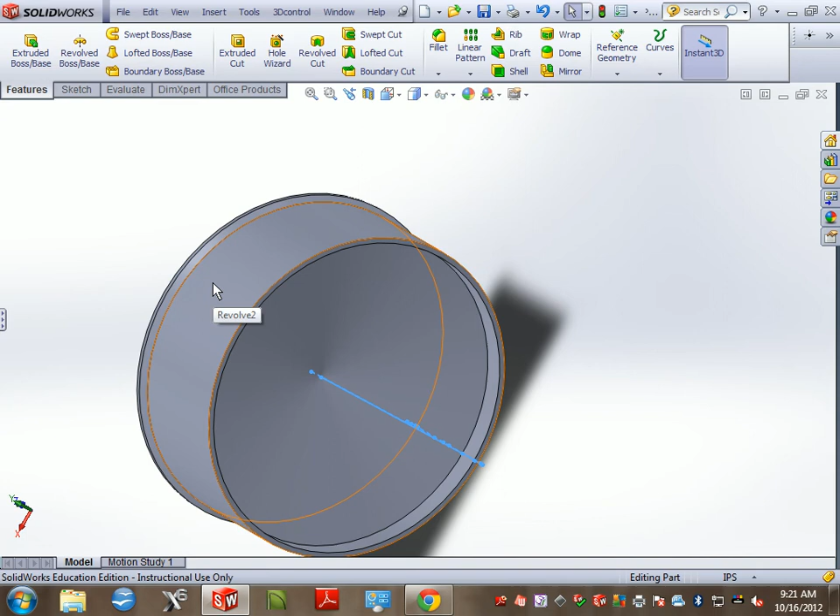Going to be making rims for a Volkswagen Jetta. Reason being is that's the vehicle that I drive, so I know the dimensions on it. Okay, so what we're going to be doing is creating a wheel with the parameters of: the lug pattern is going to be on a 100mm circle, and there's going to be 5 lug bolts, which you'll see when we start designing all this stuff, and the center bore is 57.1mm with the offset of 50mm, which you'll see when we start designing this.

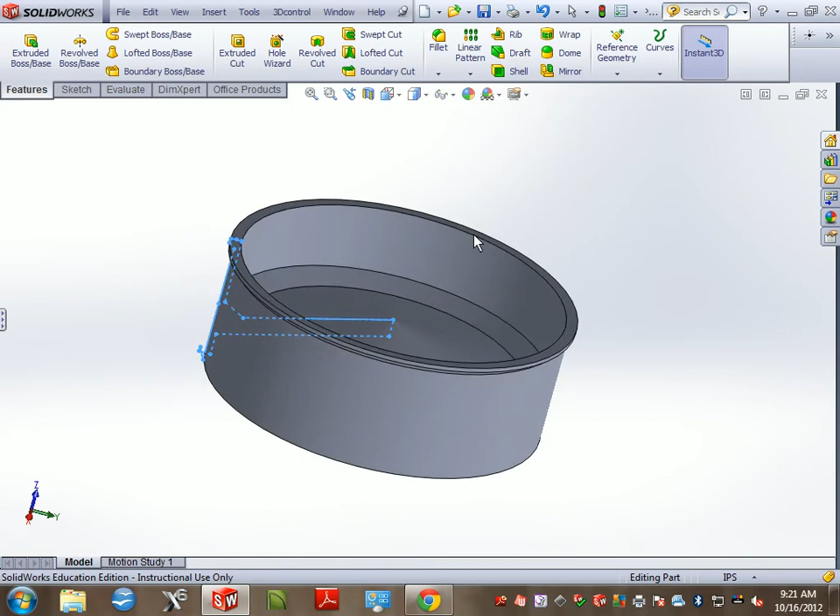Okay, now if you take a look at what I have on my screen right here, it's basically a solid wheel. If you ever watch those Orange County Chopper shows or any shows like that, they quite often start with a chunk or a solid billet wheel, and then they go and remove material to produce their finished wheel. So they'll machine it or mill it, whatever it might be. So the first step we need to do is come to how we create this solid wheel.

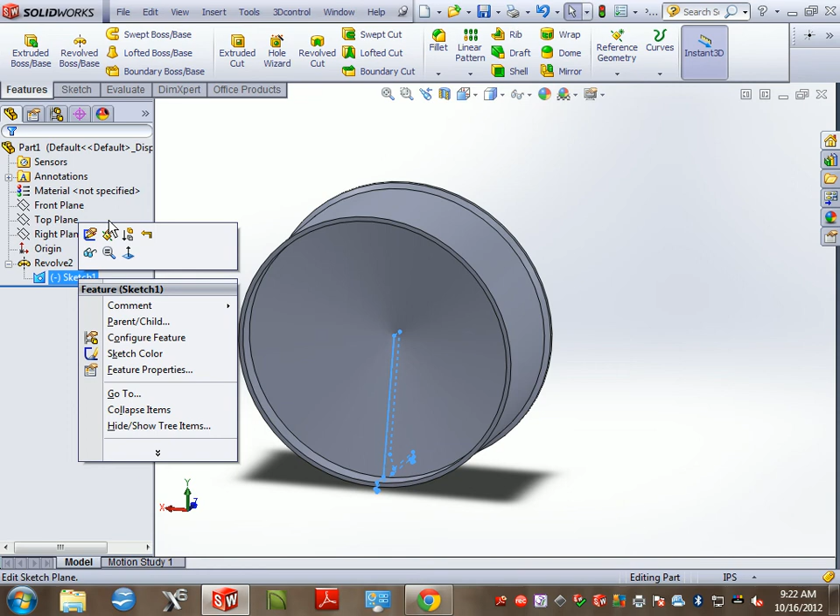If you take a look over my feature design tree, you'll notice that it's done with one simple revolve. So if it's done with one simple revolve, we know that this is created with one sketch. So if I open my revolve and take a look at my sketch, you'll see the sketch of how this is produced. There's a few dimensions here that we need to look at. Number one, if we look at the radius of this rim, I know that it's 9 inches. So this would be an 18-inch wheel. We'd take that radius and double it.

The parameters that you have for your design constraints, which I'll pass out the sheets in a minute, is between 15 and 20 inches in diameter. If you build it any larger, it's not going to fit the vehicle. So if you say 11 inches here as a radius, you're going to have a 22-inch wheel, which isn't going to fit the vehicle and does not fit the design constraints.

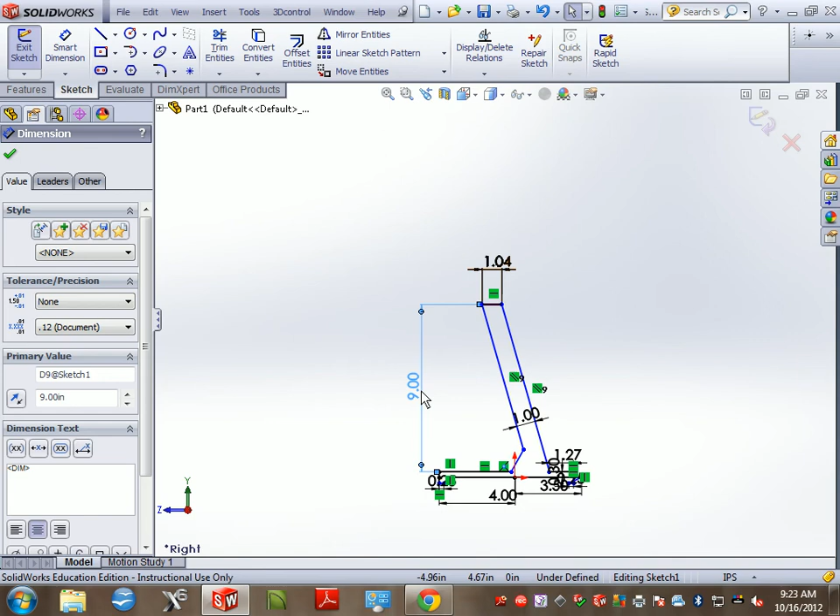Okay, so what we're going to do is create a new sketch, and I'll show you how this sketch is created. So I'll create a new part, and on my right plane, I'm going to square up to that right plane, and we're going to create this sketch, just to give you an idea of how easy it is to produce this solid wheel. This will be the first part that we go through, and then after everyone creates their solid wheel, I'll show you how to start removing material and start patterning that material so that you're not sketching 5 different entities for your spokes or whatever you decide to do.

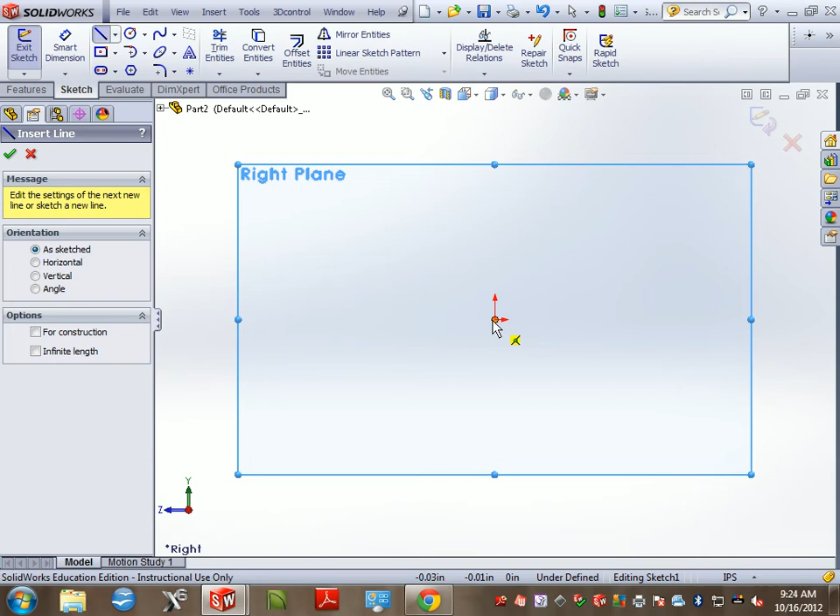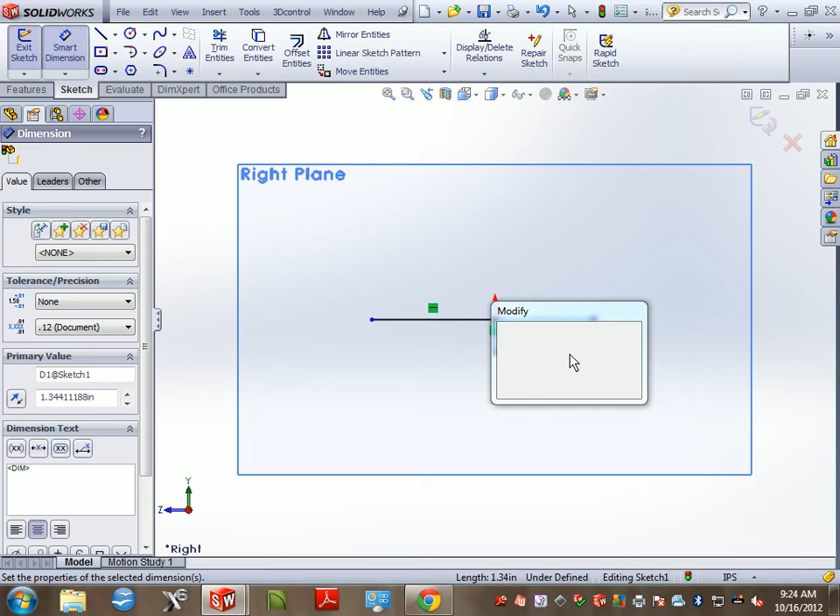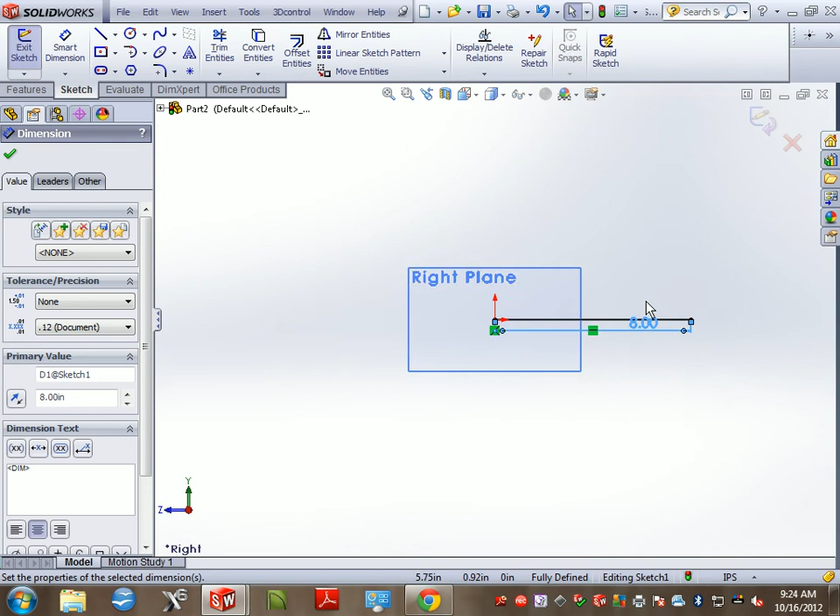Almost all the dimensions actually become very specific in this. If you do not follow certain criteria, your wheel will not fit the vehicle. In other words, if we make a rim that is 10 inches wide, it's probably not going to fit the vehicle. So in this particular case, I'm going to be working under the concept that this is an 8-inch wide wheel. I don't know why this line won't let me smart dimension it, so let's just make this one 8, and we'll work in this direction. So we have 8 inches here. That tells me that the center of this is at 4, so I'll draw a straight vertical center line so I just know where I'm working at.

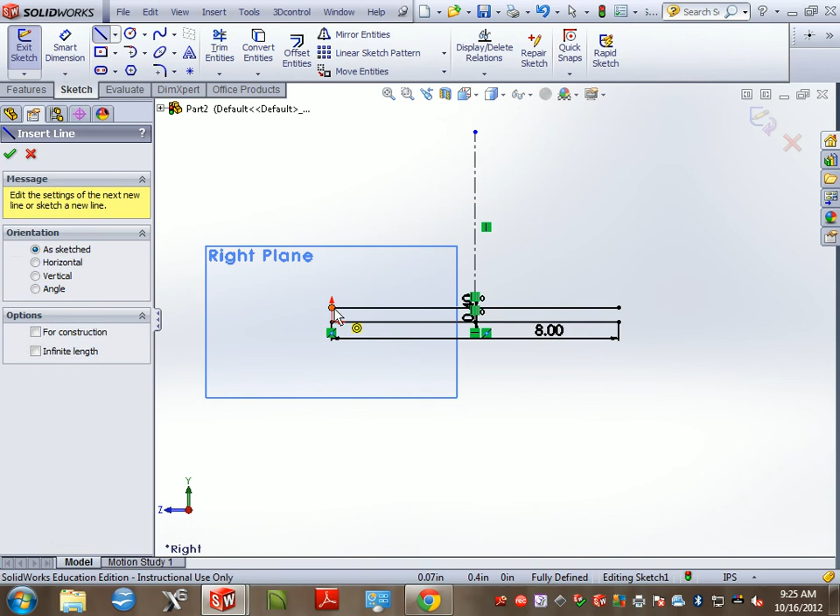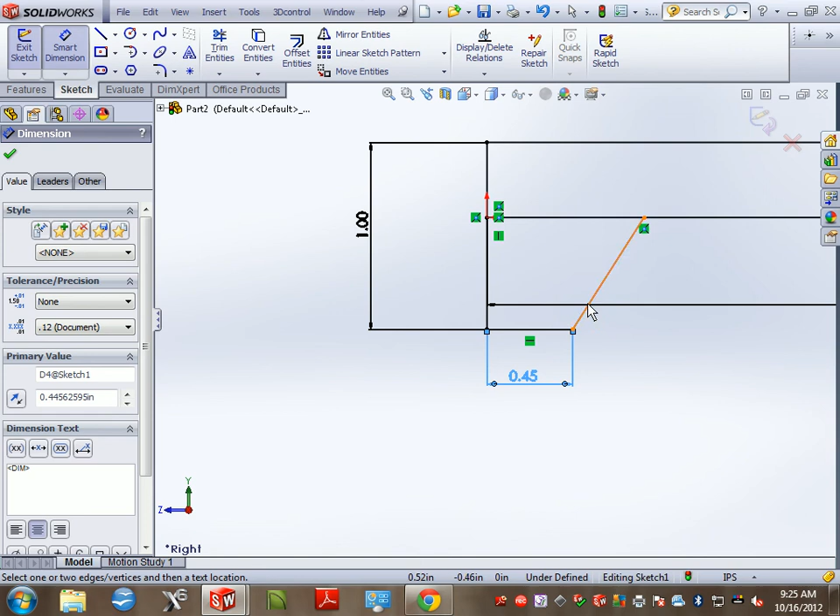Now the first thing I'm going to do is offset some entities. I'm going to offset these to 0.4 or 4/10 of an inch, and I'm going to take those up like this and get these closed. I'm also going to extend this sketch, and that's going to serve for my little lip for where the tire falls in. If you think about a tire bead, it's basically going to fall in right here, and that's going to help hold this. I recommend throwing dimensions on everything, even if you just keep it where it lies. Reason being is when you start dimensioning other items, if you don't have those little dimensions in there, it's going to start skewing up your whole drawing.

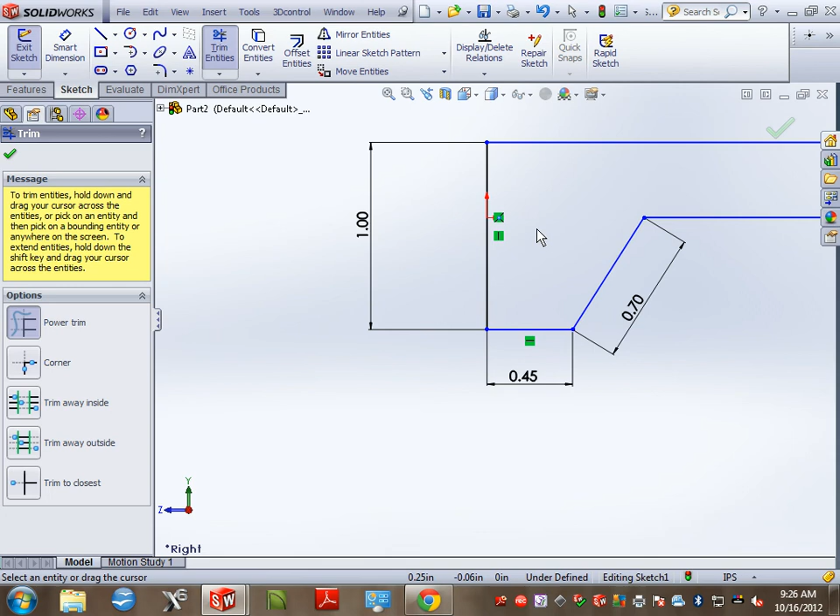So I'll get this drawn, and if you take a look, I have to trim up this entity. Trimming in SolidWorks is a little different if you haven't used it yet. If you select trim entities, we have a couple options available to us. Power trim's my favorite. All you're doing is clicking and dragging. There's no selecting like in Mastercam where you have to select the entity you're keeping. You simply just drag over what you want to delete. So it's really nice. Let's go over and duplicate the same on this side.

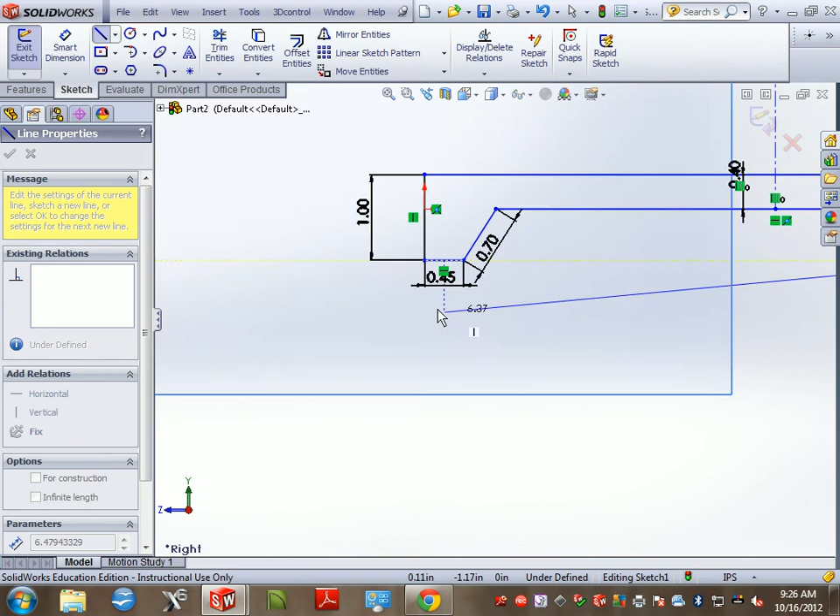And I'm coming down 1 inch. Let's see if that's what that was. 1 inch, good. I'm going to come over 0.45. And these dimensions are all specific to the design brief. So when you get the design brief, double check to make sure that the dimensions that you have are correct.

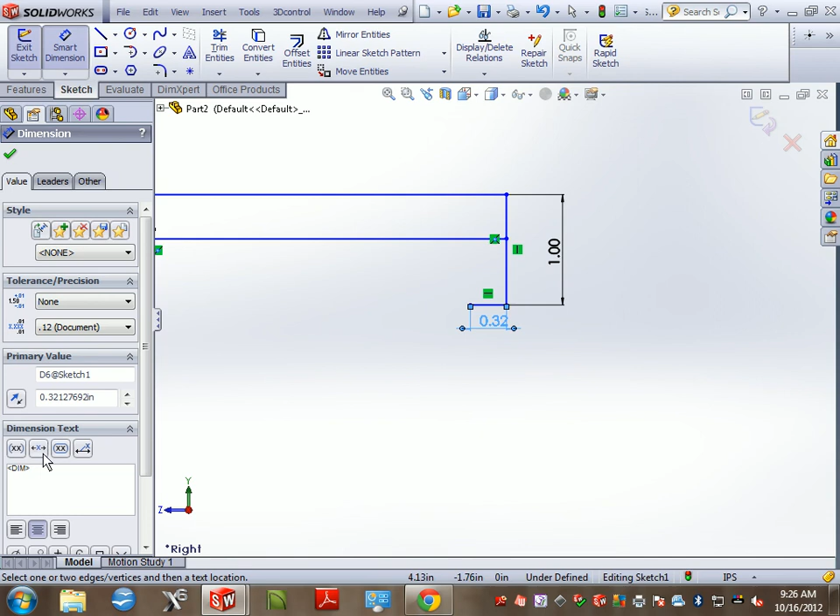Interesting. So let's get this trimmed up. Power trim. Good. All right.

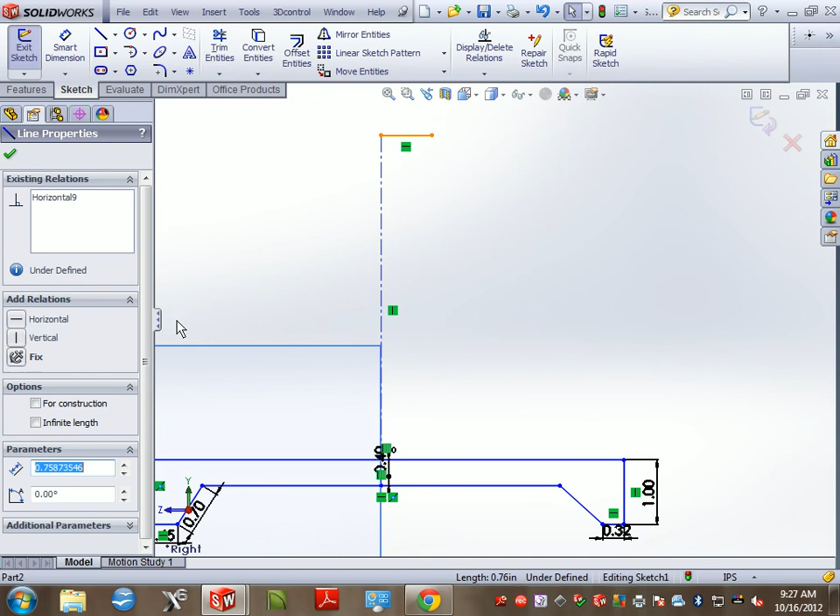From this center line I've created, I'm going to create a line that is horizontal with a value of 1 inch. You can get that dimension to 1 inch. I'm going to set a constraint that it's horizontal, which you already see here. I'll bring this line down at a specified angle, which we'll specify in a second, and I'll bring another line down, and I want to keep these lines parallel.

So you can either use the built-in constraints, or I can select a constraint after I draw it. If I draw it, I can say this line, hold shift, select this line, and set those to parallel so they won't come apart at all.

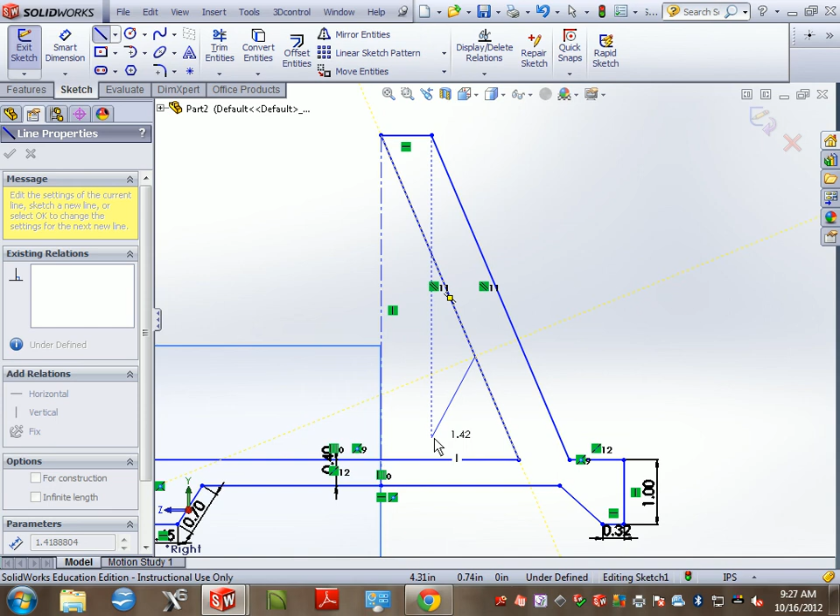I'll trim up this center section, and let's add a little strength to this wheel with a back angle like this. Now, this design right in here determines what your wheel is going to look like.

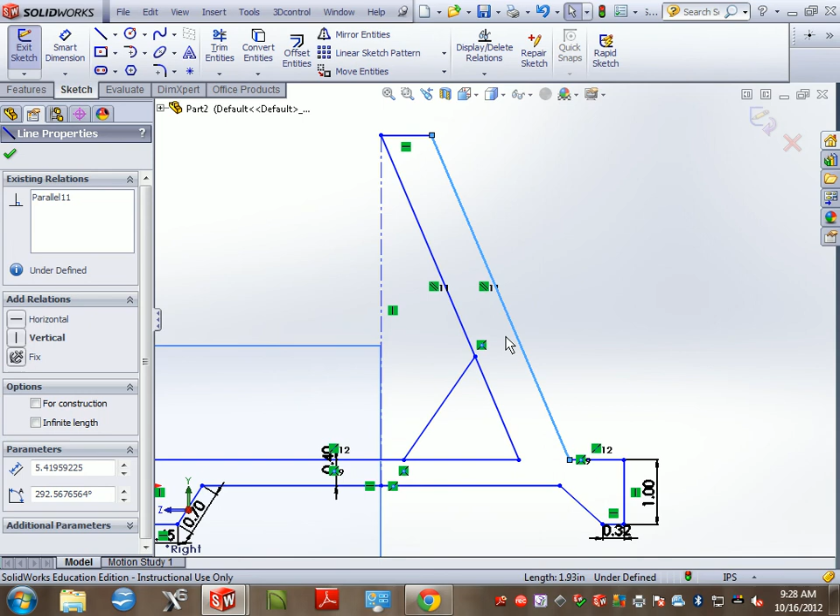So if I decide to change this—let me come back to that in a second—we can actually change that to determine what the design of our wheel looks like. Sometimes wheels almost have like Z cross sections where they come out and then come back in. This is where that would be done.

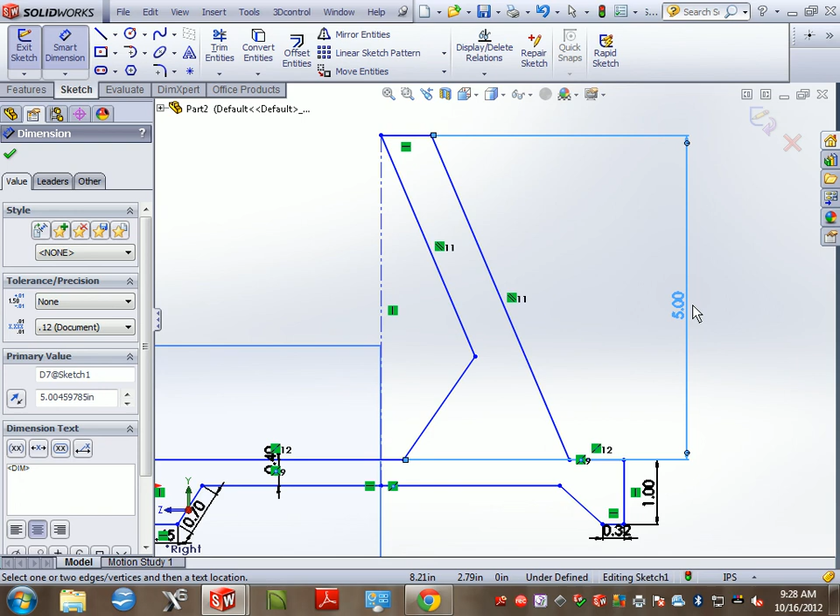Let's get this smart dimensioned, and this determines the overall height of our wheel. Right now we have 10-inch rims, not going to do anyone any good, and probably not going to win any competitions on beauty. So let's get 18s.

I would enter 9 inches here, which I'm having some difficulty entering. Let's see if this works. All right, there's 9 inches, and you see how it automatically changes these other items. So you see why you want to get your smart dimensions in to lock that in place.

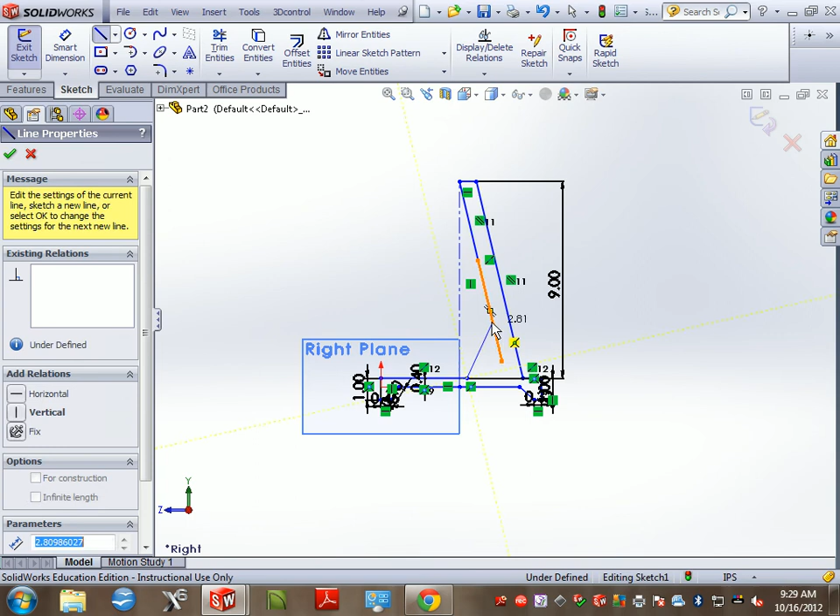I'm just going to get this extended and redraw my angle, my support angle here. Trim that up. All right, so we have the basic shape of our cross section of our wheel.

If I finish my sketch, you guys can kind of see what this looks like, and you can imagine if we revolve this 360 degrees, what we're going to be left with.

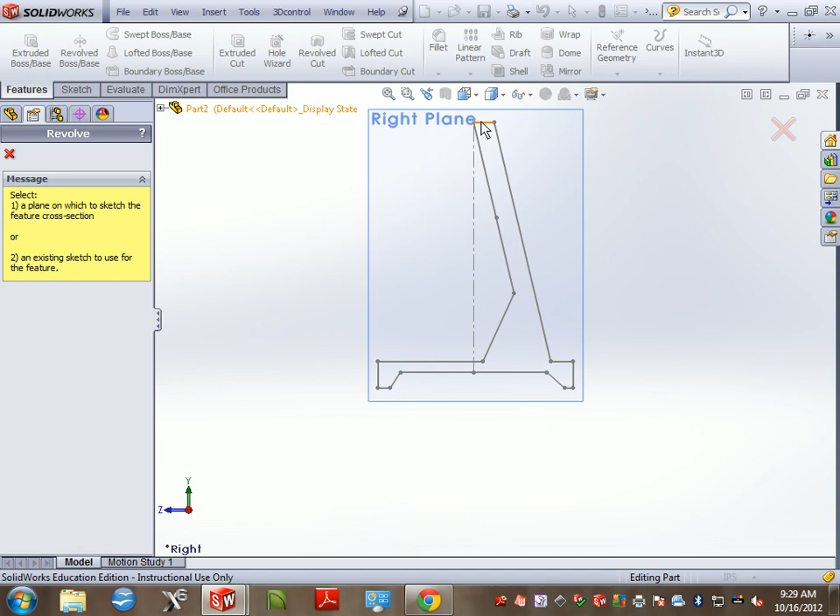I'm going to go ahead and select my features, revolve, and select this face. My axis of revolution is going to become this line, and this gets spun 360 degrees.

So if I check that off, what you see is your cross section still held there, but what you're left with is a solid wheel.

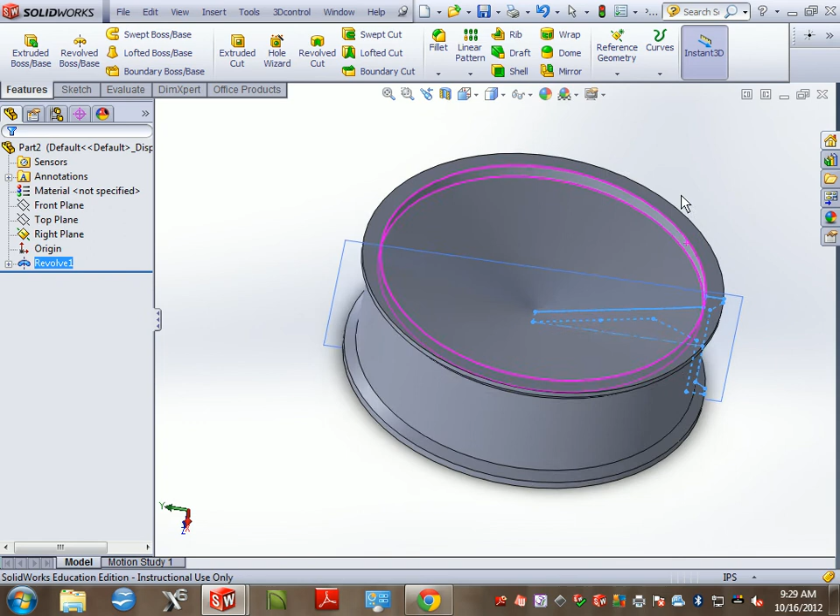Let me pull a cross section here, a section view, and we'll come from this side. There's the design of my wheel, or the cross section of my wheel. So you see how this is coming in? That's driven off that line I spoke about earlier.

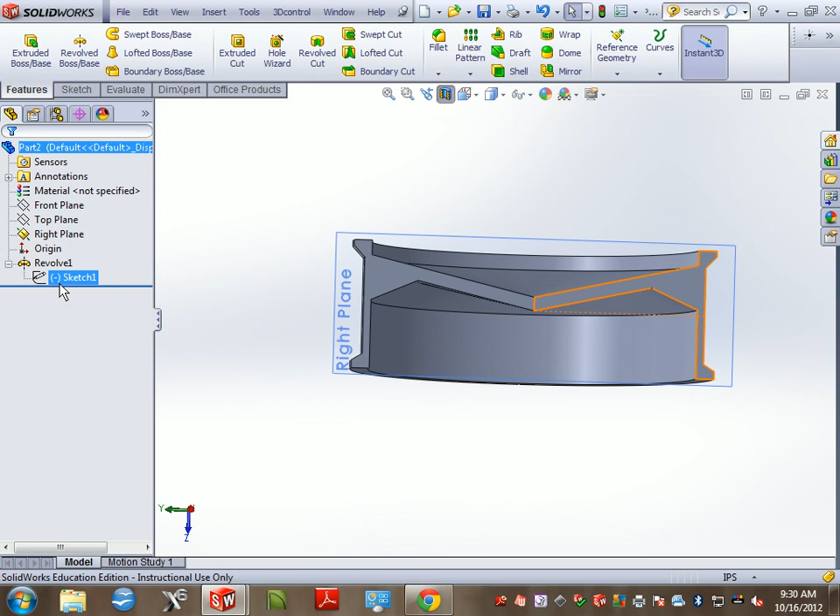If I decide to come out and then back in, almost like a Z cross section, that would be done under this sketch. So let's go back and modify that sketch quickly. Delete my revolve. I'm going to edit my sketch, and I'll go normal to it.

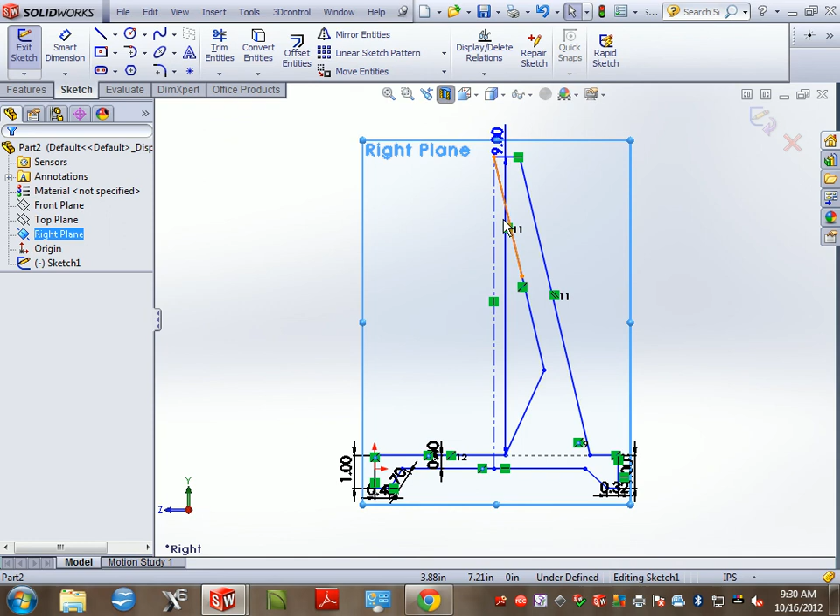Let's quickly modify this to see what we can end up with. I'm going to take this line, and let's get my smart dimension out of the way. Let's take this line and modify this slightly. Take the line tool. We'll come out and then back in.

Not really sure what this is going to look like, but you guys will get the idea. I'm going to parallel it here. And let's trim this up.

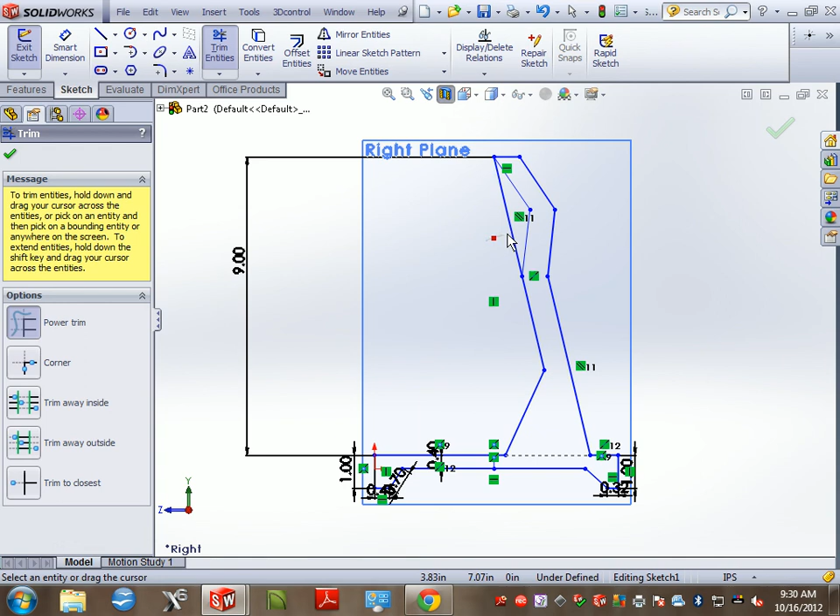Now let's go ahead and revolve this, same procedure. Axis of revolution right there. And now you see my cross section is a little different.

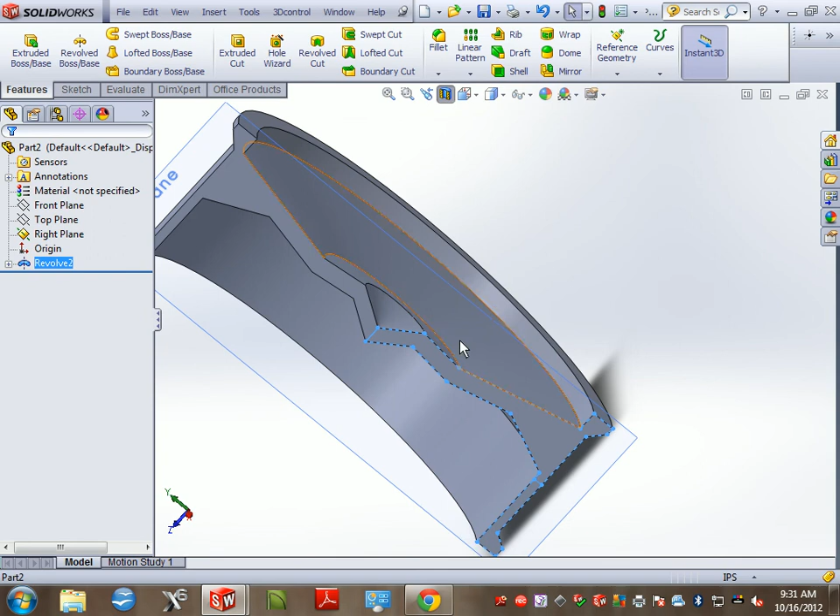So by changing that revolve feature, you can change how this rim is going to function as a solid unit. From this point, once you have this design done, it's as simple as selecting a plane to sketch on.

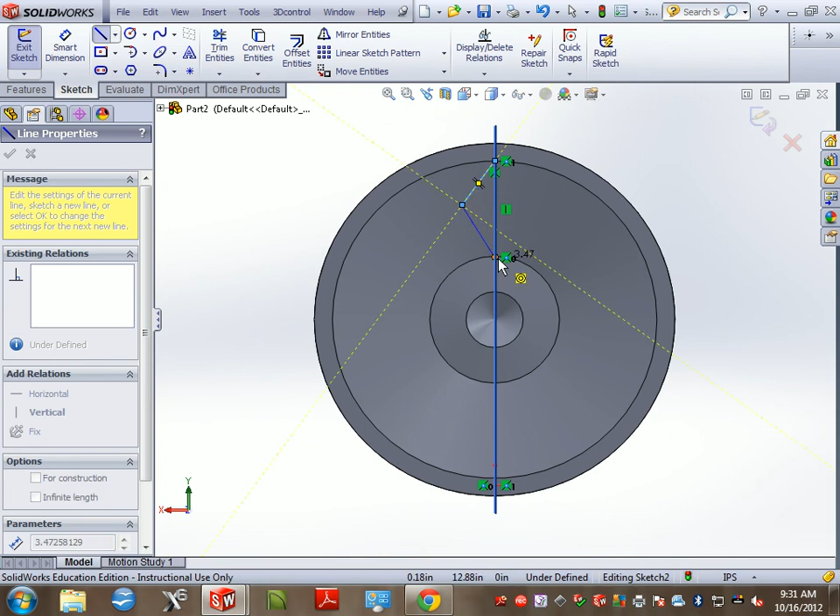Sketching some parameters, and then really just drawing what you want to remove from this wheel. So I don't know what you guys are into, but let's say we want to mirror this about this line I just drew. Let's say I want to extrude cut that.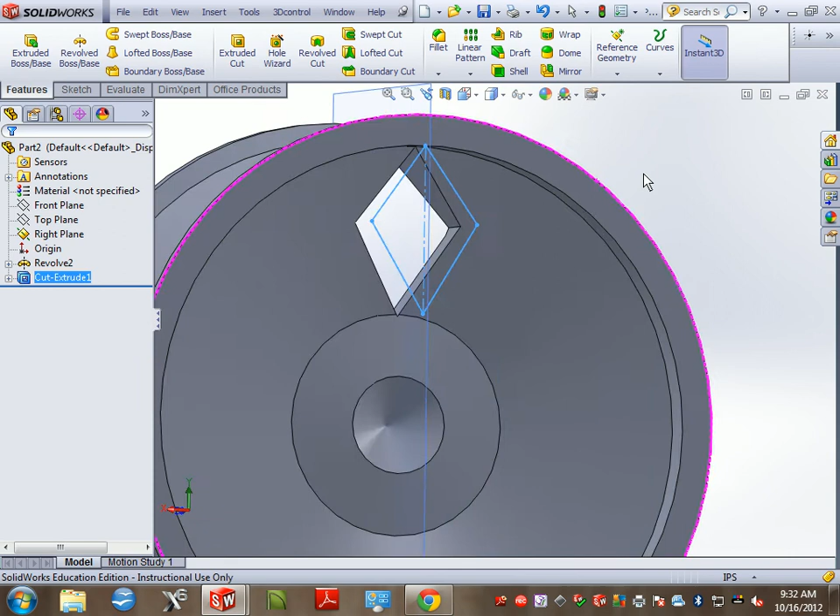I'm going to take that through my entire wheel. Come on. All right, that gives me one spoke that's removed.

If I pattern that with a circular pattern under my features, so my pattern axis is going to be this, and I want to have equal spacing, let's say we want 10 of those. You're left with a simple wheel design.

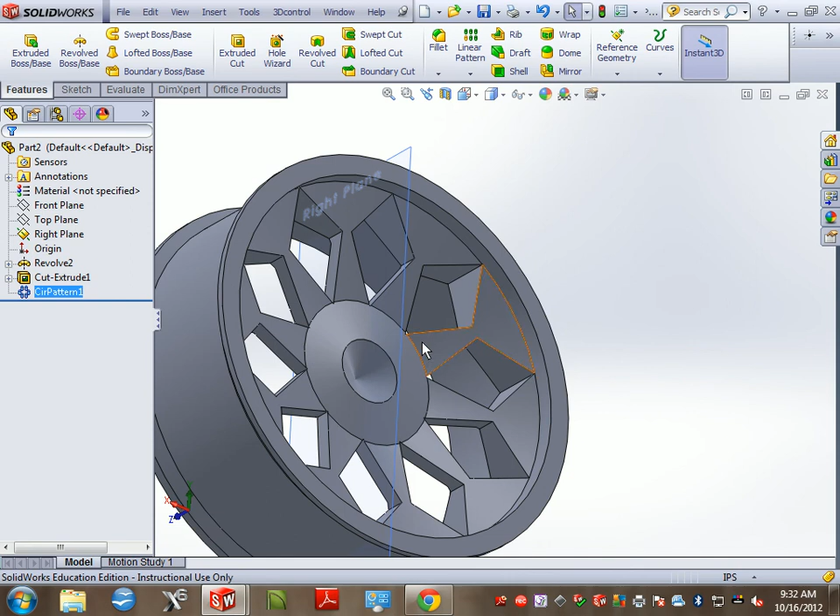Obviously not the most interesting wheel, but you guys get the idea. Now, all your specific parameters for lug spacing and so forth need to fall within this.

Okay, so ultimately, that's the start of this project. I'll save this so we can make some additional videos a little later down the road and show you how to go about doing that. But that's the start of where we're going to begin our rim project.